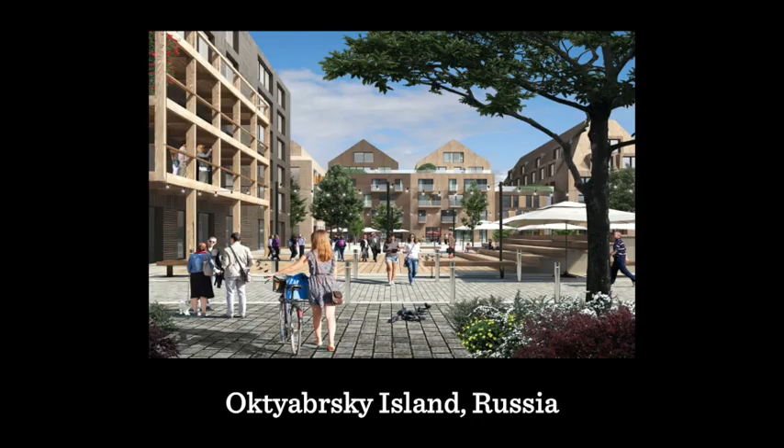Hello and welcome to the Pineapple Awards for the second half of the judging of the Place in Progress category. My name is Christine Murray and I'm the founding editor-in-chief of The Developer and founding director of the Festival of Place. The Pineapples are all about celebrating best practice.

Awards are a really great way to celebrate the realization of great places, and we're grateful to the Design Council who have sponsored these awards since their inception and continue to support us this year, helping to shape some of our judging criteria and some of our processes too. These awards are about the quality of the spaces created between the buildings and success from the citizen, resident, tenant, and customer point of view. That sometimes has to do with the mix of spaces that created the atmosphere, and the pineapple, given that it's a traditional architectural symbol of welcome in the UK, something that we believe great places should be is welcoming.

So all of these projects are vying for the Golden Pineapple Trophy, and they are judged in 2 or 3 parts depending on the category, which involves reviewing the application submitted for the award, visiting the sites, and the final stage is the live presentation to the judges, where they have the opportunity to ask candidates about their ambitions for the project. And then after that, the judges will make their deliberations, and the winners will be announced on the 13th of November at 3:30 as part of the Festival of Place program.

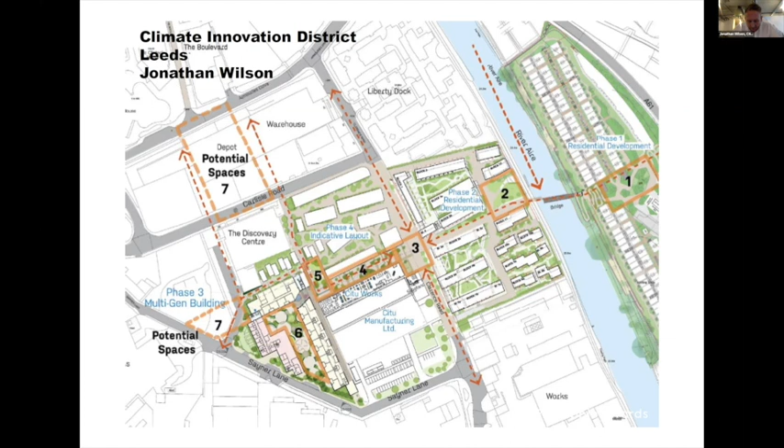We do enjoy a challenge, and when we took this piece of brownfield land on the edge of the city centre, there were certainly critics, both in and outside of Leeds, who wondered what on earth we were doing in effectively an old industrial part of the city.

We have, over the course of the last 6 years, really elevated the status of this area, and further regeneration is now, we're happy to say, happening in and around the area, which has been a direct result of these plans, and they're no longer aspirational plans. They're plans that are very much on track and in track.

You'll see on the bottom of the screen that with the solar panels, that is our manufacturing facility that we designed to our own Passive House standard system back in 2015, and we now deliver all our homes from that manufacturing facility. The facility is fundamental to the district because it opens a level of transparency for how homes are built. It will remain there as part of the district for the foreseeable future, and now has our offices and centre of excellence for climate change attached.

So these are the first phase 1. I don't know whether you can see my mouse, but in the distance, we'll come on to some better images. We started on site about 2 years ago. We're now about 55 homes into the development, and we've also built our offices.

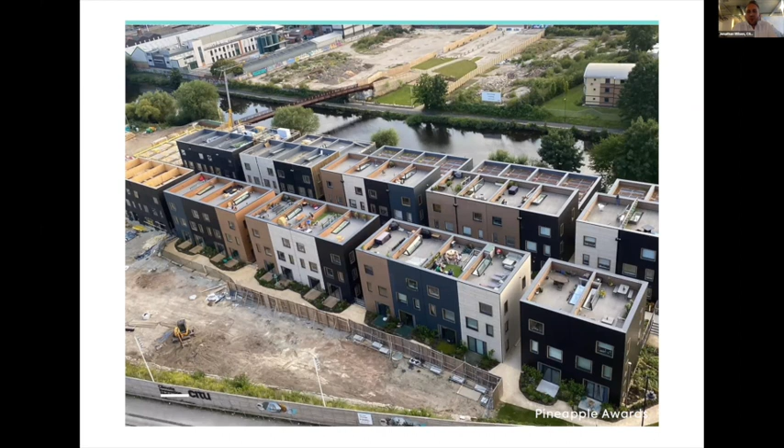As I said, we're about 50 homes through the development. We now, on the bottom part of the screen, you'll see a delineated part of the site. We're building some 6-7 story apartments that will help to create a more diverse community, with 1-2 bedrooms. We've put our social housing peppered around the apartment block, and we start on the phase you can see in the top of the screen where our bridge lands.

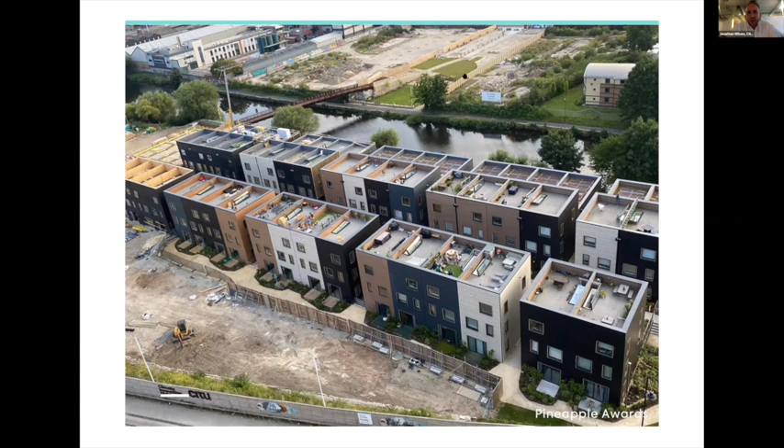The bridge we put in very early in the development was a fundamental part of the regeneration, not only of our 22 acres, but also of the communities on the edge of the city centre that had been disconnected, predominantly by roads.

A good stat with this bridge is that the community of Cross Green, which sits to the north of the site, can access the new high school in the city centre with 11 fewer road crossings. A fundamental part of this has been including connections that take us seamlessly into the city without the need for cars.

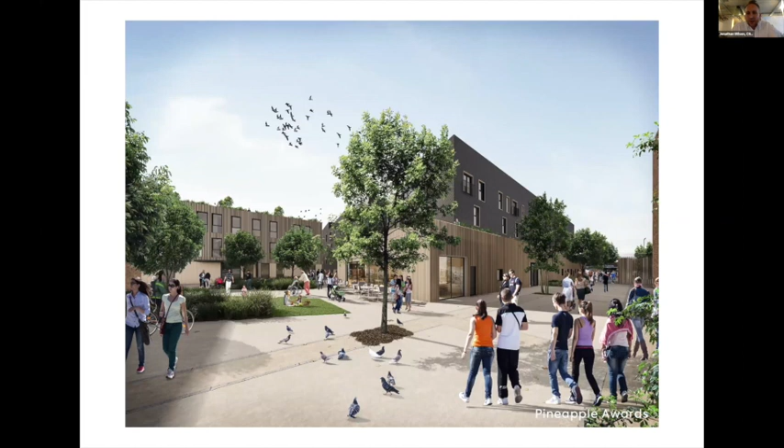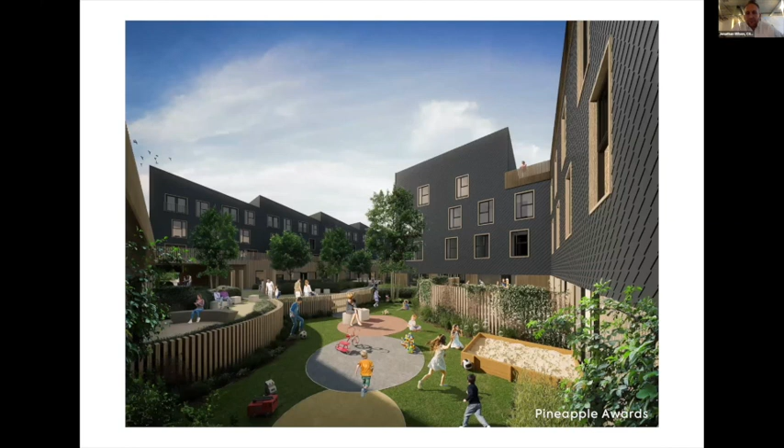To wrap up the future of the development, we will continue building houses and apartments, and we've also submitted a full planning application, likely to succeed in the coming months, for a multi-generational building including a 2-form entry primary school, a 70-bed care home, and apartments on top. We believe it's the first multi-generational building in the world to include all three of those generations in one building, and we're very proud to continue this development.

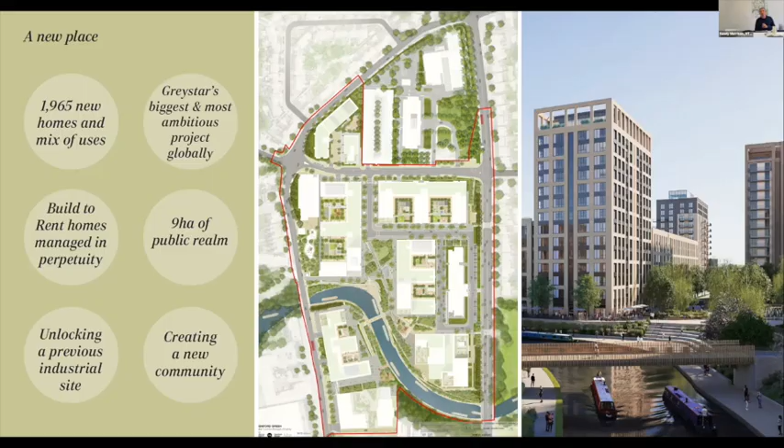So the site had been derelict for about 10 years. Its entire history had been as a factory site, previously the UK headquarters of GlaxoSmithKline. To walk round the site previously would have taken you getting on for 10 minutes, and no one could come into it — it was a secure area. So the opportunity that we had was the opportunity to open the place up.

It had been completely disconnected from the community and also disconnected from the canal, so where the canal ran through it, you couldn't walk along it. And what we realised right from the beginning was that the opportunity was to demolish the existing buildings and, for sustainability reasons and financial reasons, keep all of the material from them on the site. That's what we wanted to do.

And what that allowed us to do was level off the site so that we could create level access across a bridge, a new bridge over the canal, and make step-free access from one corner of the site over to the other corner. That gave us a bit of a challenge because the levels then all came up around the canal, but that also turned out to be the opportunity for the development of the main space.

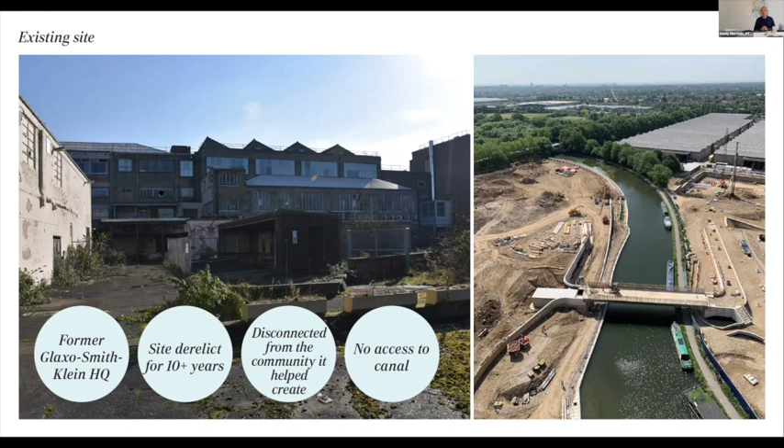Thank you, Amy. Most of the presentation is going to be about the landscape, because we believe that people love to live next to other living things. So the focus of the scheme and the development, and the place we've made so far, is about the living landscape. But actually the place is working pretty hard.

In order to keep the headroom under the bridge for people to walk along the canal where the bridge flew across, we needed to keep the bridge quite thin. So we tunnelled under the canal to connect the services from one side to the other.

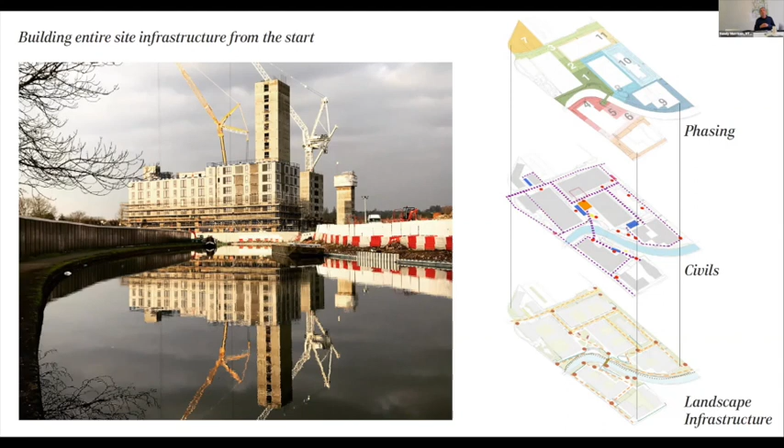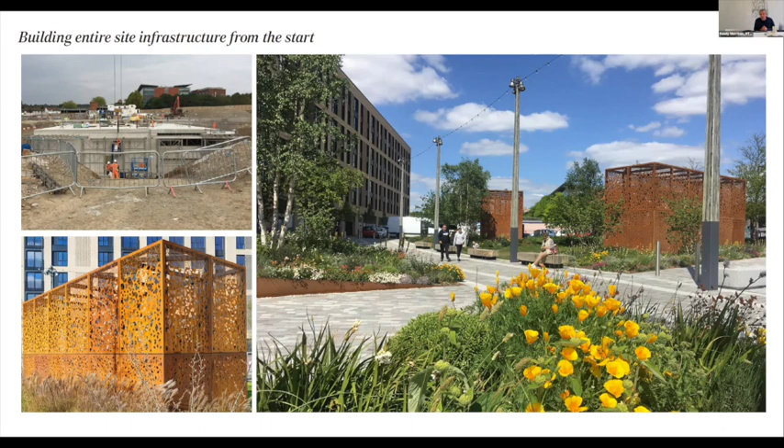Now I'll hand over to Amy, but what you're looking at here is the idea that the living landscape should dominate everything. There's a very large energy centre in the scheme, about 30 metres by 30 metres in a double height space, but it's under the square in the middle of the development. The only thing you really see of it is these Corten steel boxes coming up. I'll pass you over to Amy to describe the landscape in more detail.

Thank you, Sandy. As we've already said, the whole master plan was really based around creating a sequence of complementary green spaces which maximised the amazing views towards Grand Union Canal, and created a pedestrian-focused public realm which could provide a green backdrop for the building, but also for the community as a whole. One of our key concepts was to stitch this area of Greenford back into the wider green infrastructure network and contribute towards a wider nature recovery network.

Something else key to us was creating a sense of identity, so the design of the public realm started to draw on those key assets — the canal and also the site's industrial past. You can see in some of the pictures of the finished scheme that we focused on bold detailing and the use of industrial materials, a lot of timber, a lot of Corten.

You can also see in the image a lot of the key spaces we delivered. One thing to note is that there was a generous amount of public realm delivered with the first block in order to ground it and create that sense of place. So we have a civic square at the heart of the development, which you can see in the top right image, which I'll talk about in more detail.

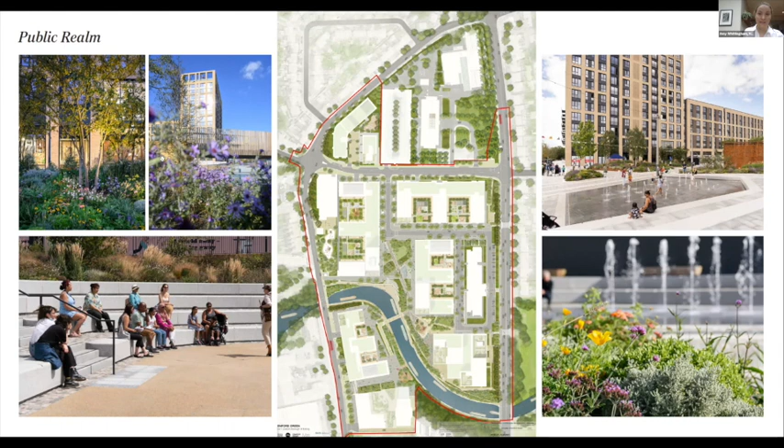Key to this was creating a sense of community. The site had been isolated for so long, it was important for Greystar to welcome the community back into the site and create a network of green spaces which provide a real backdrop for activity. We did this in a number of ways.

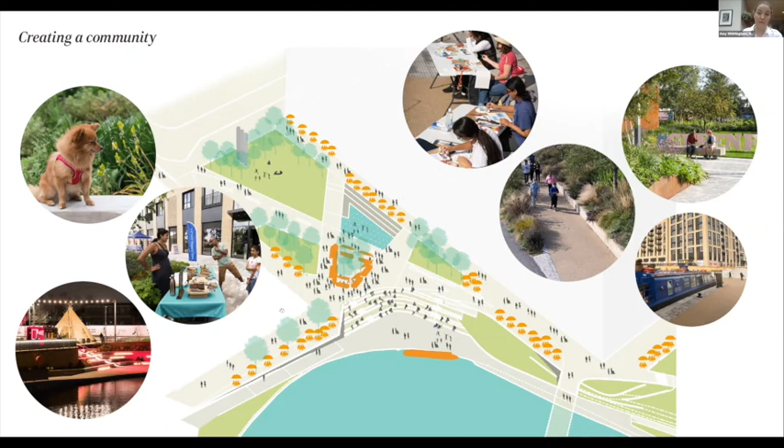Some of the early sketches for the Civic Square looked extensively at how we could create this platform for activity. For example, we did sun studies into the position of the water feature, looking at how we could maximise sun and views so children could keep playing there for as long as possible on a summer's day. We positioned the amphitheatre adjacent to the canal side mooring area, and we have a terrace adjacent to one of the micro breweries at the ground floor of the block itself.

Then some images of the completed scheme that really demonstrate the way in which the block is grounded within the landscape, and the landscape provides this green and biodiverse setting for the development as a whole.

Throughout the scheme, we planted 390 trees. We really had a focus on planting mature trees, which create that sense of place from day one.

That understanding of the importance of landscape and the creation of green spaces also extends to the approach taken to the internal block itself. The Greystar model is dependent on attracting but also retaining renters, and there was a focus on creating an environment which fosters community, partially done by the creation of landscape spaces which allowed people to meet and get to know their neighbours.

Some of the ways we did that was through the creation of generous communal podium courtyards within the development itself. These had pavilion structures within them which had communal kitchens that people could use, with a barbecue and a table where people could sit and contribute and congregate. We had water features, we had areas of play, really trying to foster that sense of community.

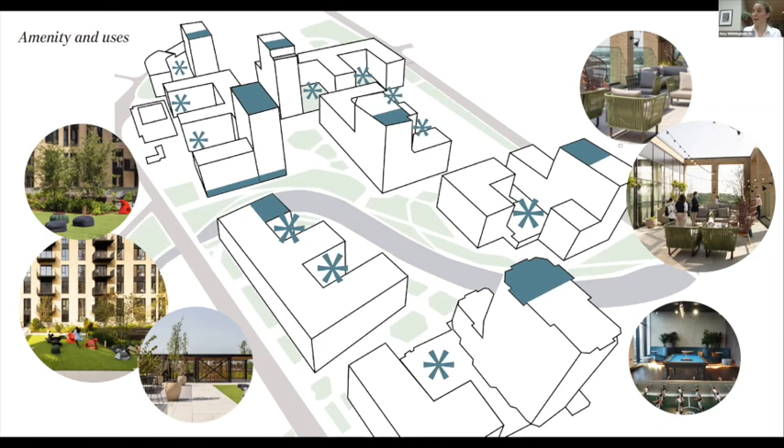We're looking to complete the development relatively quickly, so we've used off-site construction, technologically refined homes, with fantastic benefits from the point of view of CO2 savings, and also vastly reduced numbers of deliveries to site. So a much better neighbour as a development, which in turn helps to foster the community's appreciation of the place we're making.

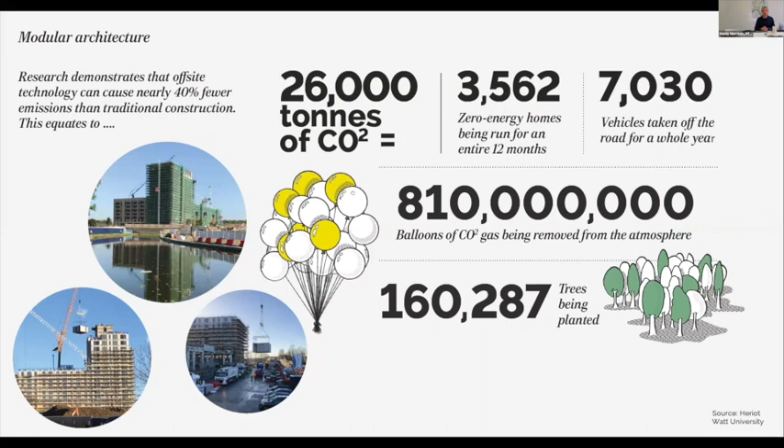I'll rattle through the last two. We've done lots of events, partly for our own residents who are in the first building, but also for the surrounding community - outdoor theatre, music, art, lots of things going on.

If you move on to the next one. What we're trying to do over the next 10 years is finish the place off. But the great thing about having done the landscape first, it's when the cinema arrives on the square and when the other people turn up and when the workspace turns up - there'll be about 4,000 people here - the landscape will be 10 years more mature by that stage, and we think that's a fantastic thing to try to do.

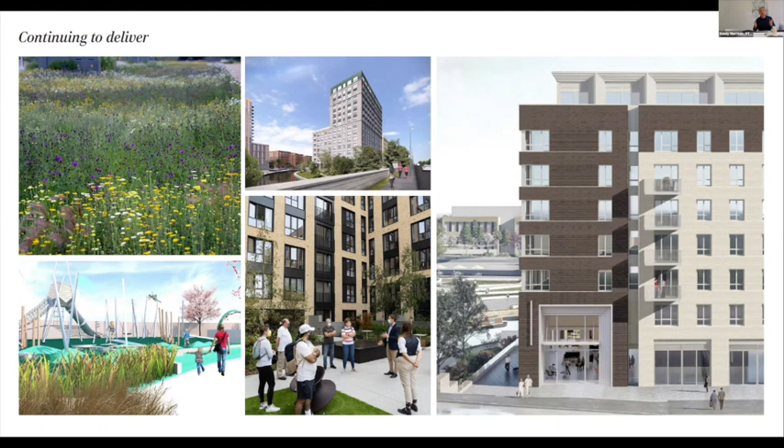We're starting on the next building, which is the one on the right-hand side there, and we're completing the design on the one on the opposite side of the square that has the cinema in it, and we're looking at meantime uses for the office too.

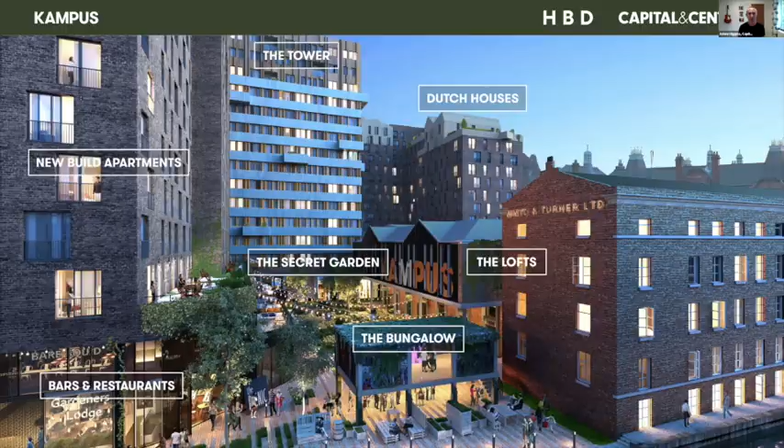So this was an image we did a few years ago of what we wanted to create, which is completely different, as I say, to perhaps what most people thought we were going to do with a sort of open courtyard capable of being used for other things.

We just wanted this space that was completely overgrown. So we've got some really big tree specimens in there, which we'll come on to in a second. And this was really the brief we then used to get the landscape architects and everyone else excited about what we wanted to create here.

I think even to this day this is the unique selling point for Kampus, as opposed to all the other residential schemes being built within Manchester, where to some extent landscaping is perhaps almost the thing that's thought of last.

So we wanted it to be like this, and even though this is CGI you'll see in a minute, it genuinely looks like this as well.

Everything was gated off. It had been empty for quite a long time—one of the buildings had been empty for 40 years, some for about 10 years. It wasn't hugely loved, bits were falling off the remaining buildings, but fundamentally there was just no permeability.

So all the areas to the south and east of Kampus weren't particularly well used either, because there was just no footfall passing through this 2.5 acre lump of land right in the middle of the city centre.

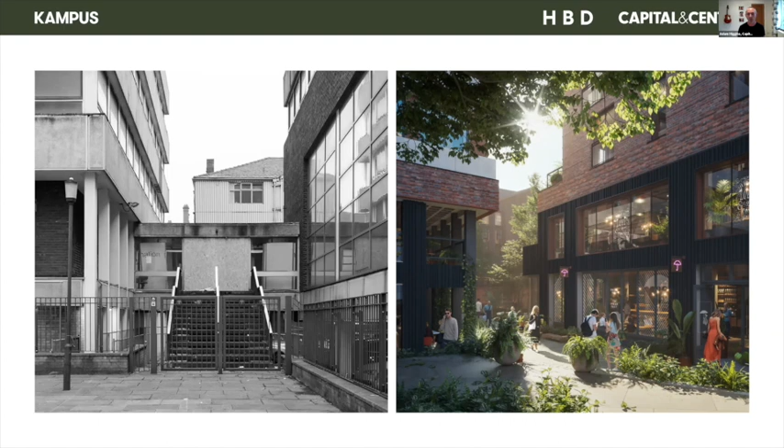And then Little David Street sits in between the 2 old warehouses. We've kept things like the fire escape, as you can see on the CGI on the right, reconditioned it, made it safe, and they've become little gardens for some of the apartments above.

We've kept the pulleys, we've kept all these weird and wonderful windows and arches where we can. The idea is this becomes one of the main, quite small entrances into that central garden area. It's almost like when you're in those beautiful cities abroad in Europe and you stumble across a little alleyway and find this amazing square or garden in the middle. That's what we're trying to create at Kampus with these four little fairly narrow routes in, rather than have great big roads into the middle of the site.

But it's very easy to do things on CGIs, of course. It's actually much harder to do it in practice because you've got pressures from funds, from banks, from contractors who obviously want to make it easier to build. Not everyone shares your vision that you want to put huge landscaped trees and things like that in there.

So I just wanted to show you, all the rest of the pictures here now are all real pictures for what it's actually looking like now, on the run up to when we actually open this thing properly in the spring of 2021.